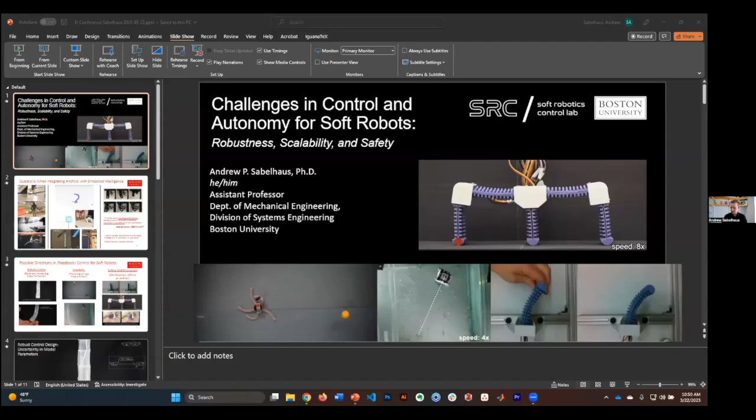So thank you all for having me today. I am really excited not just to be here as part of Embodied Intelligence 2023, but also to be in this particular session. I'm really excited to be, in a sense, among other folks who are thinking about control systems and autonomy. I'm a control systems engineer, sort of joining the soft robotics conversation here. And what I'm hoping to bring to this today is a larger perspective on the question of what we would like to do when trying to integrate control and autonomy into soft robots.

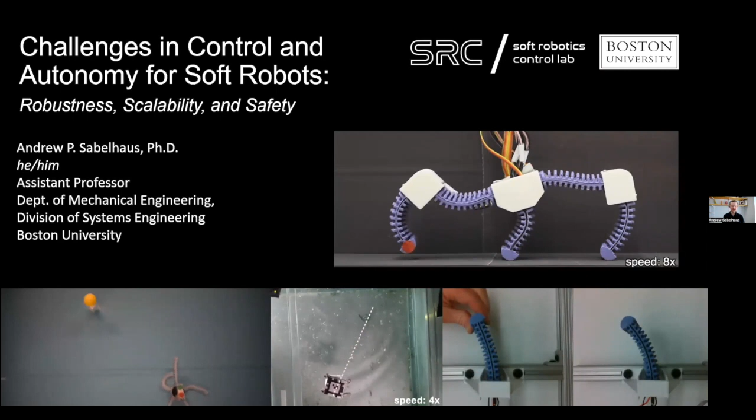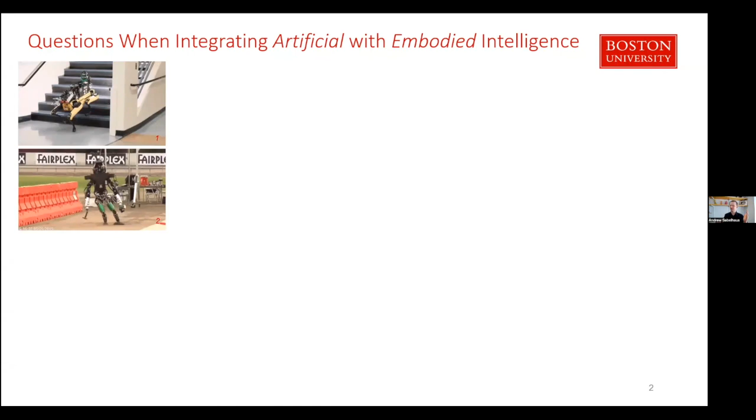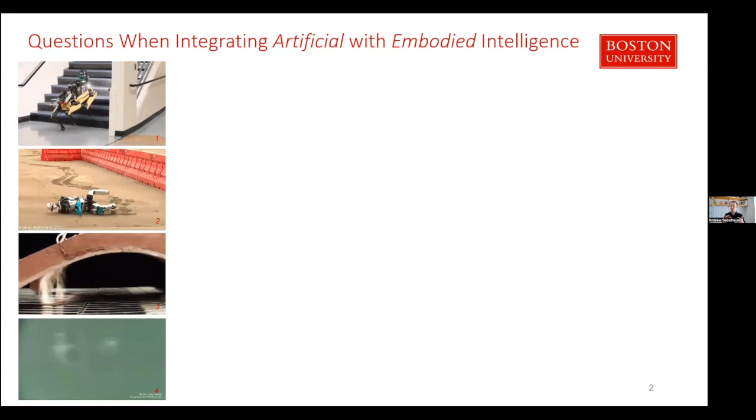And I'll bring 3 different possible directions here based on the work that I was doing as a postdoc and with my new group at Boston University, thinking about robustness, scalability, and safety. So the higher level vision here is the conversation about integrating some amount of artificial intelligence with embodied intelligence. So please excuse the DARPA Robotics Challenge video. It's not here to illustrate the usual conversation about why we would need embodied intelligence, but more to contrast with oftentimes what we're looking at with the types of devices that we build that are softer, that have that sense of embodied intelligence. To illustrate this gap, right? Maybe why we would need to bring back in some of the artificial when we focused on the embodied.

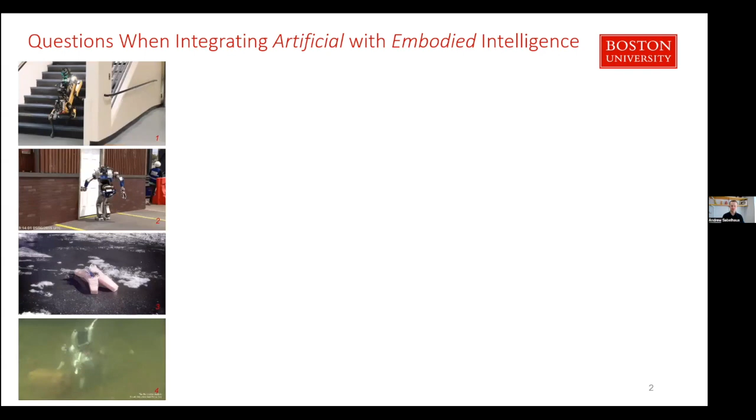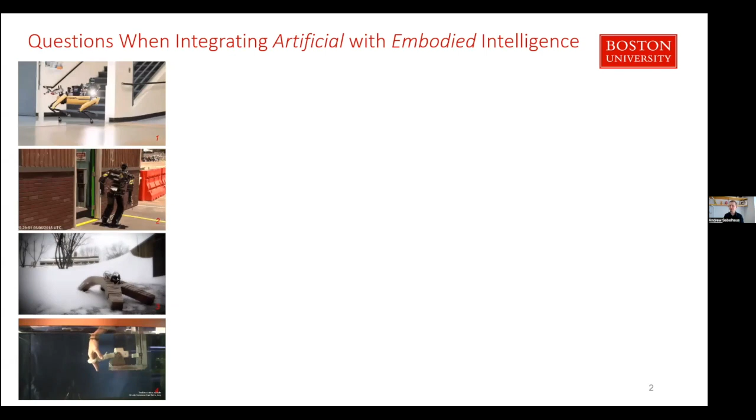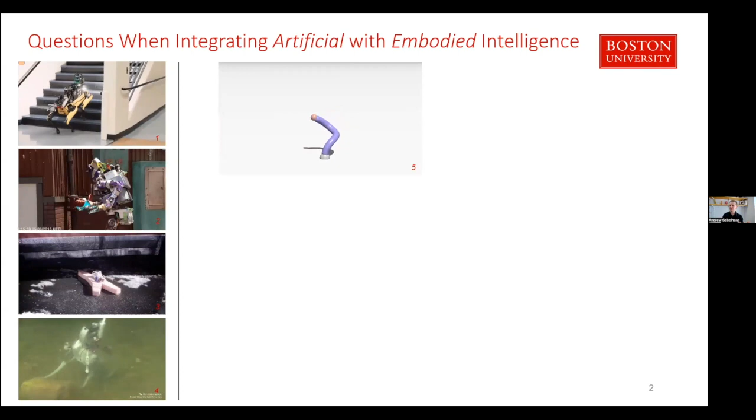Oftentimes the motions of these devices, while very impressive with respect to the environmental interactions, are much simpler, right? You could imagine maybe if these rigid robots were successful, the types of motions they could perform are much richer. So there's a big gap here. And folks in recent years, very recent years, have been thinking a lot about how to bridge this gap. And oftentimes have been applying sort of traditional perspectives for traditional types of goals for what we might call controlling a soft robot, whether this is reinforcement learning or things like generating trajectories. We're thinking a lot about positioning of the robot's body in space.

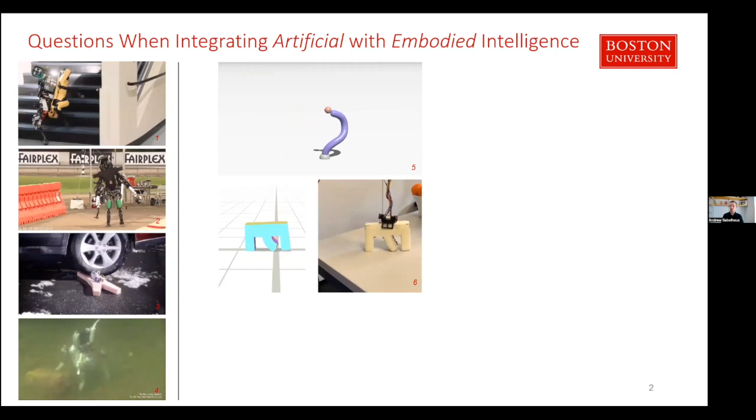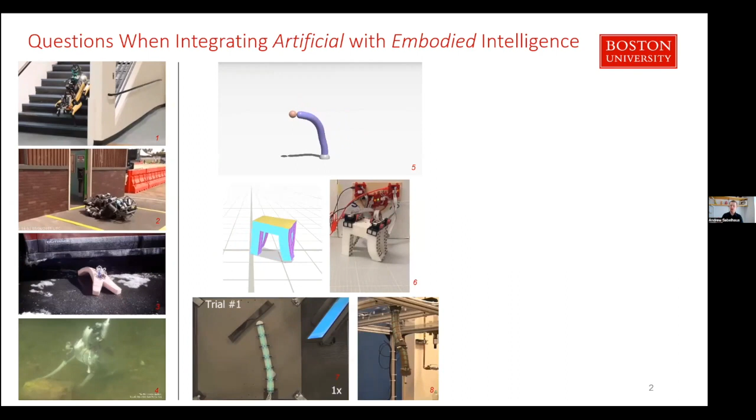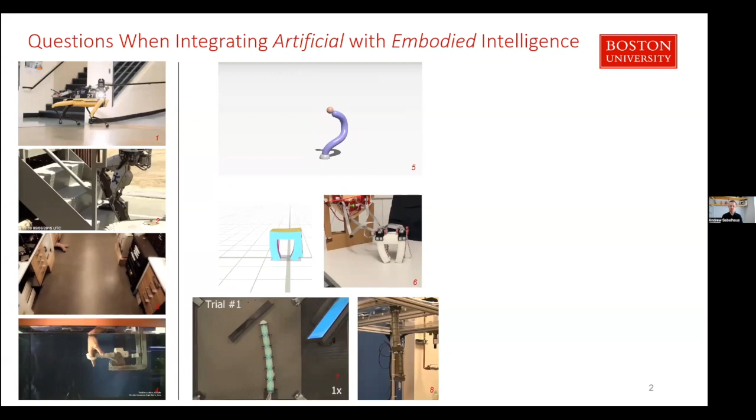Oftentimes this comes with limitations with things like computation and implementing these in real time. And so the results are either limited to simulation only or pre-calculate a set of inputs, click go, and then let the embodied intelligence take over. So there's a question about whether or not that temporal separation of artificial and embodied is really going to be optimal for what we would need to bridge that earlier gap. And the times in which we have been able to do real feedback, closed loop in real time for soft robot manipulators in particular, the environment has still been relatively simple, well known, and matches our model pretty well, which raises a question: will that technique be transferable to the unstructured environments we're most interested in?

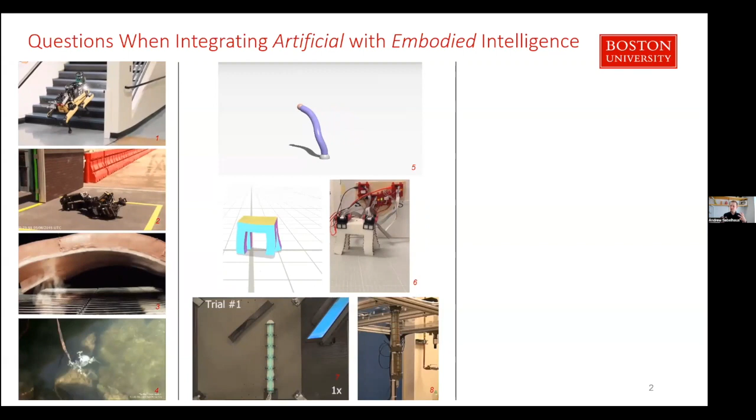And a big perspective here that I always like to think about with this conversation is a point that one of our colleagues made very eloquently just a few years back in a mathematical sense: with a goal of good tracking performance, right? Having a robot move into a particular pose, we end up reducing the compliance of the robot sort of by default.

So there's a question of, if we were thinking about a traditional control goal, the tools that we have in our toolbox of having a system track a trajectory perfectly, the right solution in a sense is going to be something that's rigid. So if we're talking about systems that are no longer rigid, is that perfect tracking really going to be our goal?

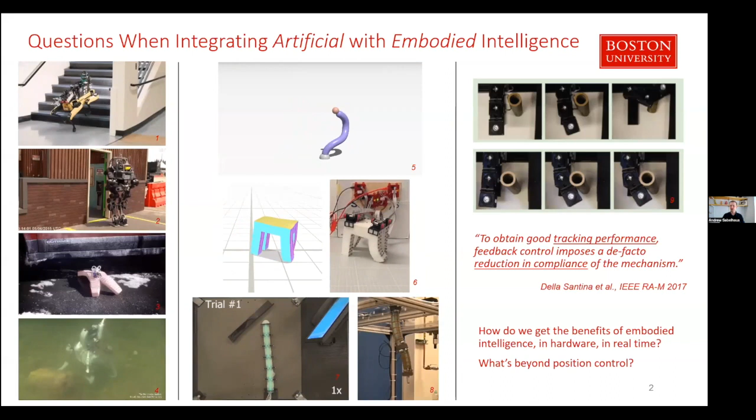So what does a control goal and a goal for autonomy look like that respects embodied intelligence, that brings it into hardware, that can happen in real time? And in particular, is there something beyond just positioning of a soft body in space? I think there are three possible options as part of this larger conversation. And I'm very interested in what you all are thinking about here too, especially other folks in control who are thinking about adapting our toolbox of techniques.

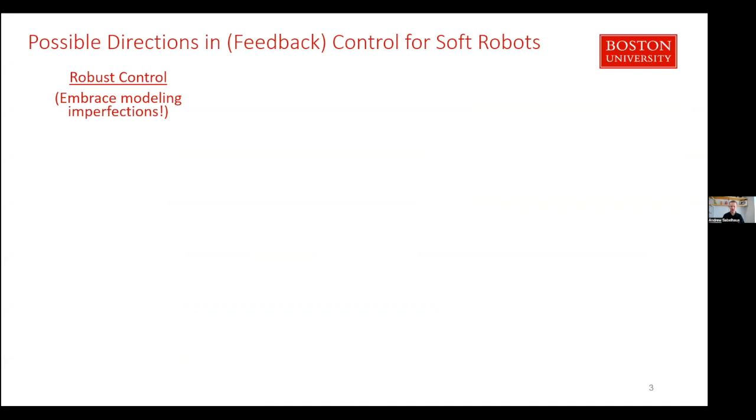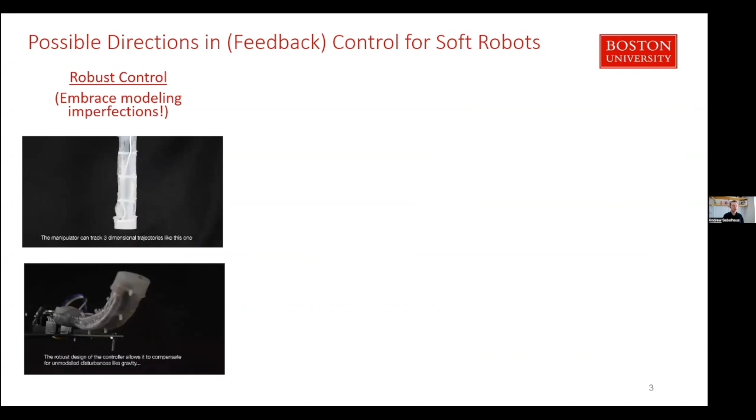So first one is robustness. This is something that Professor Mitra made an excellent justification for earlier, where we could think about if our models are imperfect, if we're simplifying our models, can we instead design controllers that accept that those models are imperfect and still have properties like maybe stability, something that we're comfortable talking about?

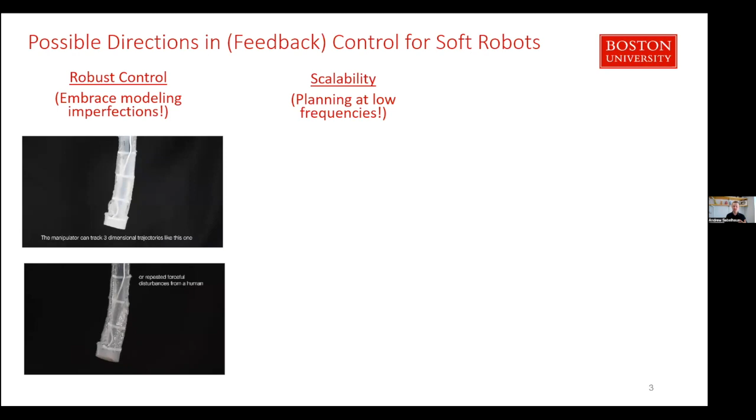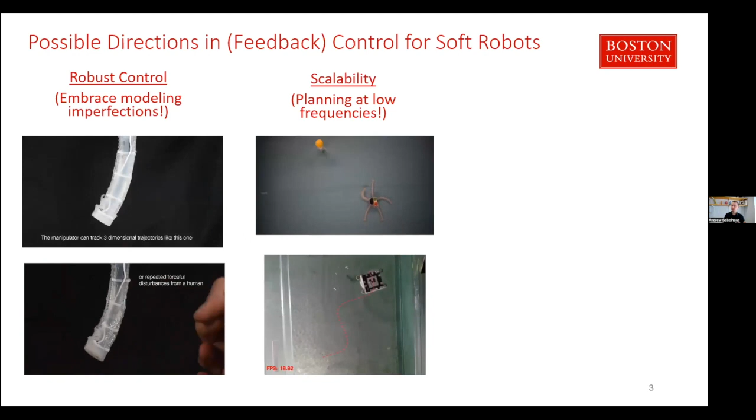Another one is to think about this scalability and real-time type of challenge. And if we were to reframe our problem that we might call a control problem, instead as a larger question of autonomy, we might be able to justify this like planning, something at a larger time scale, lower frequencies, that lets the embodied intelligence take over for short periods, in a sense.

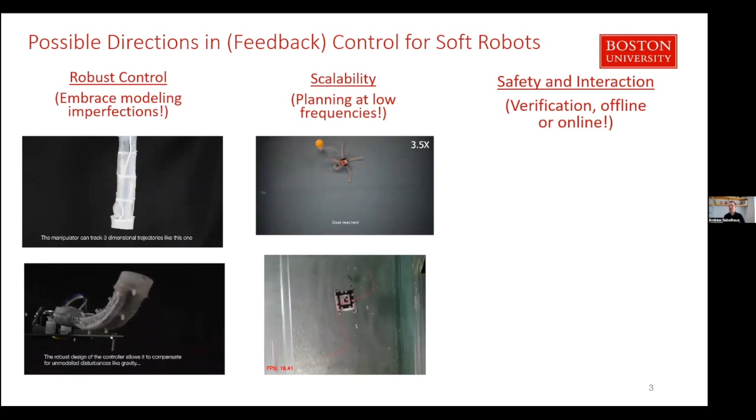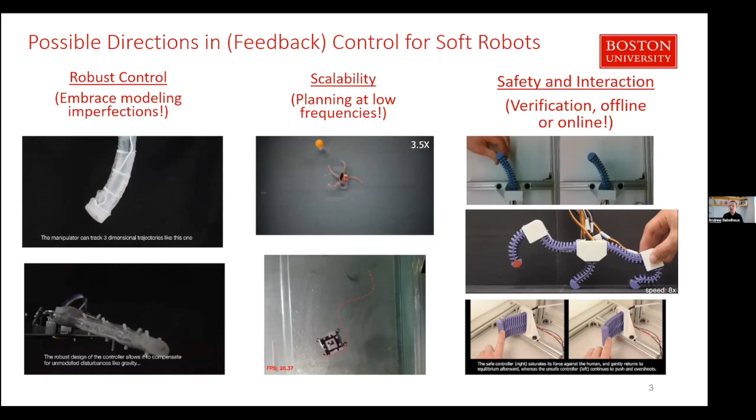And the last one, I think, that really gets at the heart of our argument for soft systems is thinking about safety and interactions. We have a strong set of tools in control systems and in robotics that let us talk about things like safety verification, and they haven't yet been brought into soft robots. I'm going to show some really initial work in my group towards doing that for our particular types of designs that use these shape memory alloy wires as actuators.

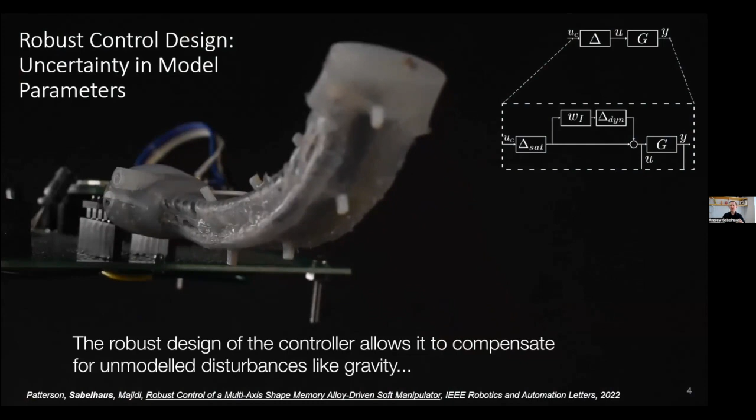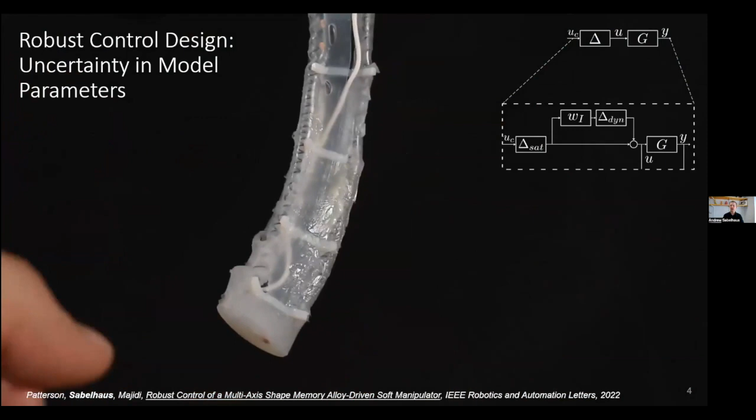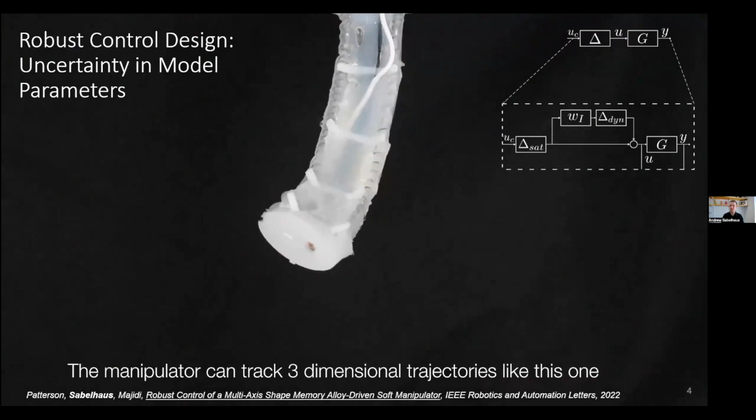So this is a particular robot that I collaborated with back when I was at Carnegie Mellon with Zach Patterson, who's now a postdoc at MIT, where we had a shape memory alloy driven soft manipulator. And our approach with this was to think about robustness in the state space sense rather than robustness in the frequency domain sense here. Thinking about can we just express large amounts of the dynamics of the system as parametric uncertainties? And it turns out that this actually lets us do things like completely ignore gravity and put in a relatively arbitrary expression for damping and not worry about what the soft material is really doing, still get pretty good performance out.

The other example here is thinking about planning. So if we have a robot that takes a relatively discrete set of actions in the first place, like this swimming brittle star-inspired robot that would push its legs in one direction, we could think about simulating a large number of options offline and then choosing between those actions. So instead, we've now discretized our problem by doing simulations beforehand.

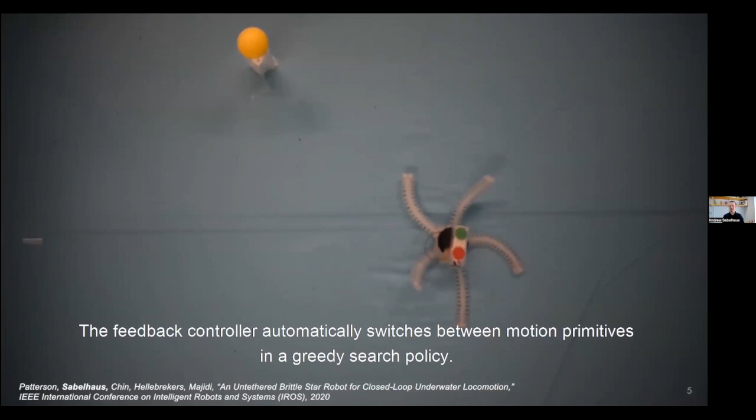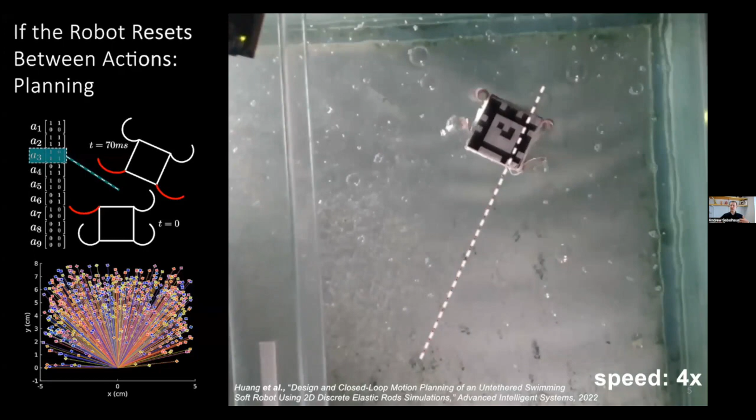And an even simpler version is this underwater starfish robot that motivated the example with the robust control earlier, where it might even be the case that we could hand tune a set of these options and still get really impressive performance out. So thinking here about maybe put the computation offline, generating a smaller set of options for online.

Transitioning to thinking about that question about safety and verification. So here's an example of a planar limb that has shape memory alloy wires on either side. Like Professor Mitra had said, for these types of actuators, they are controlled by temperature. So we're passing electrical current through them and they heat up, they contract, et cetera. So this is a test of a teach and repeat, a relatively representative traditional robotics problem.

And so what we thought about for this particular issue was temperature safety for these shape memory alloy wires. It's actually a very common problem that other practitioners with thermal actuators will know and maybe if not love, at least respect the challenge of these things overheating and either losing the material properties, losing the model consistency, or just otherwise having a safety hazard.

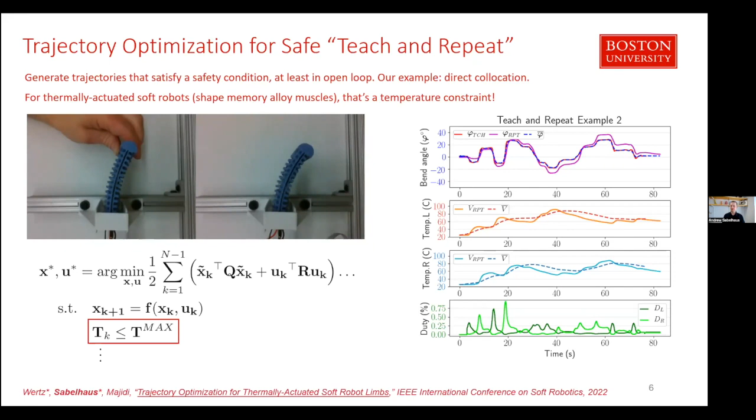So a very simple method might be, in terms of generating these trajectories, we could think about offline optimization methods, now just with extra constraints in our optimization problem. We did this and we showed that at least in this open loop sense, we could ensure some type of condition here. Now, that doesn't necessarily get us over the pre-calculate and click go problem, but it does lead a step towards this intuition that what we're talking about here might be more about constraint satisfaction rather than tracking behavior. And here's where this really ends up coming in terms of loop closure.

So we implemented a really simple feedback controller for this particular limb and showed that we can overheat it actually very, very easily. We could command an infeasible state, we could put in a disturbance, that kind of thing. And there's a tool called invariance that is highly used in things like legged robots. And the principle here is that if we can, under the action of our autonomy, our controller, render some set invariant, where the robot never exits this set of states, we could call that safe. That's a very formal definition of this idea of safety.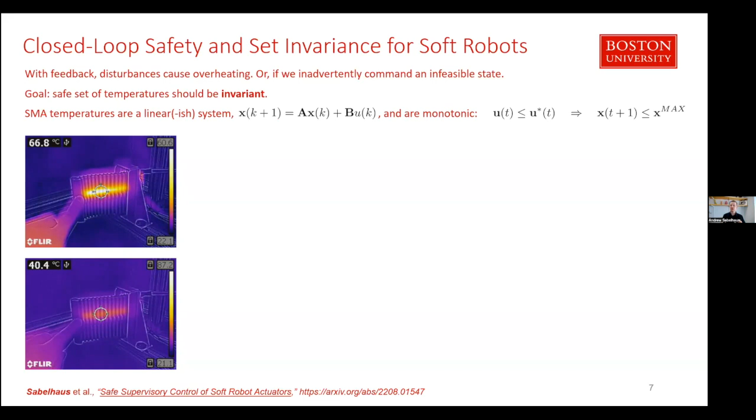And luckily enough, for our shape memory alloy wires, the temperature dynamics, at least, not necessarily the stress and strain, we could actually express them as a linear system and observe that they're monotonic. The intuition here is if you push more current through the wires, they heat up more. Less current means less temperature on the other side.

And because linear systems have this very nice result for motion planning from one position in space to another, we could go and say, what would be a maximum limit that would reach our boundary, the boundary of our set that we're trying to render invariant? And we went and attempted this out for a number of these shape memory alloy wires.

Oh, can you all hear me? Oh, I heard something. Is everything good? All good. Yeah, no, sorry, not sure what that was, Andrew. We'll watch out for it. Okay, no problem. Yeah, I just know these headphones are apt to cut out.

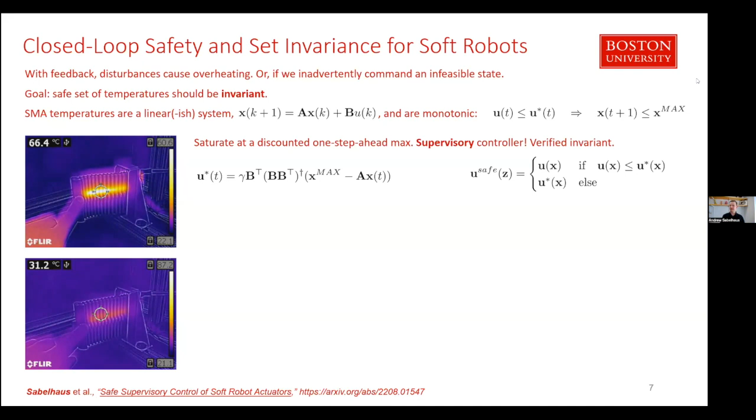So the purpose of this one is that a very simple way to talk about invariance might be saturation, or supervising the actions of another nominal control system. So here is an example of this infeasibility question, where we ran the closed loop system but just included this saturation. And we showed that the robot indeed does not move in the motion that we originally intended, but still maintains some set of safety. So as opposed to thinking about tracking performance, we're thinking about constraint satisfaction here. You're looking at the blue lines versus the pink and the red lines in the plot that's evolving in the bottom right.

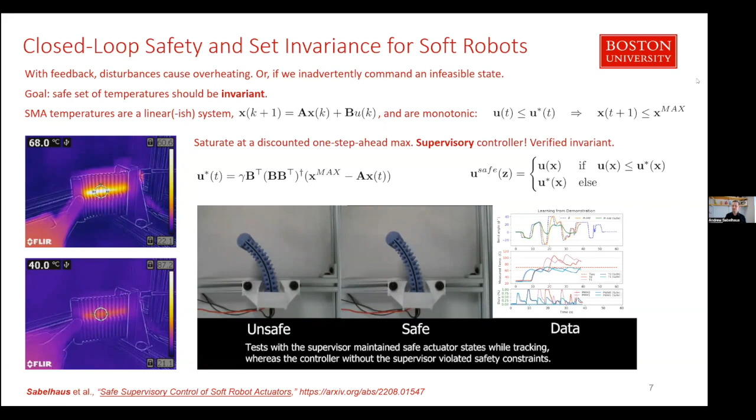And the last bit of what I've started here at Boston University with my group has been implementing these into practical robots. So this is a three-legged robot, still very much under review, trying to find its place in the literature, but I think it shows this nice example of how we could think about doing safety in a piece of hardware.

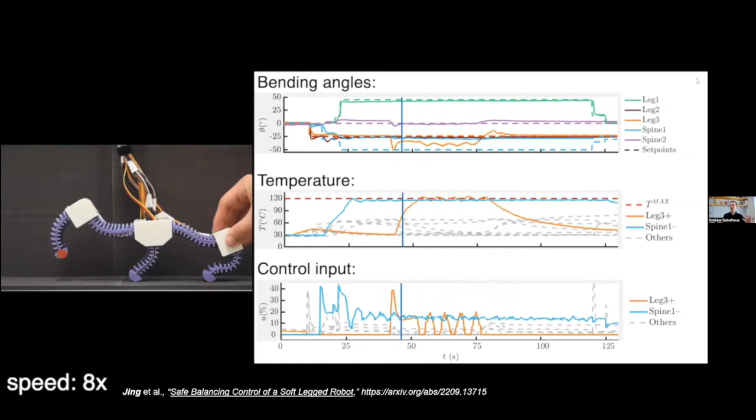So what we did was we took 5 of these individual limbs that move in 2 dimensions, connected them up just to have a simple example of what we might mean for something that's legged, and then performed a balancing action and had a really, really extreme disturbance come in here. So someone came in and really bent the robot in a way that the wires would have overheated. We showed that they don't, right? So a simple validation and verification here.

That's actually all I have for you all today. My hope is that this brings a little bit of lightness into our conversations for control engineers. The only last thing to say is I am very much looking forward to collaborations on this. I know that all of these are really cutting edge topics. So please let me know if you're also interested in things like safety and verification from an artificial intelligence sense.

And let me bring back my meeting controls and I will stop sharing.